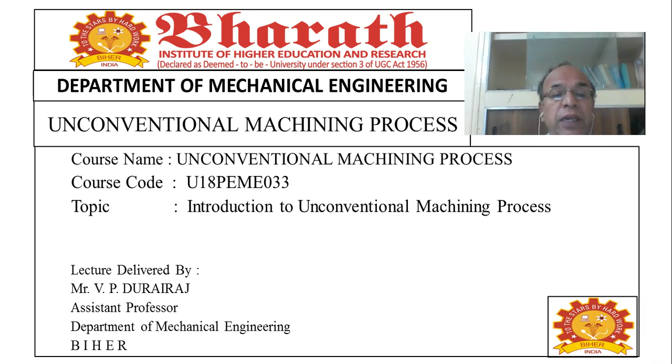Unconventional Machining Process. Course code U18Peme033. Topic: Introduction to Unconventional Machining Process. Lecture delivered by V. P. Durairaj, Assistant Professor, Department of Mechanical Engineering, Bharath Institute of Higher Education and Research. His subject is Unconventional Machining Process, and the syllabus covers Introduction, Need for Non-Traditional Machining Methods, Classification of Modern Machining Processes, Consideration in Process Selection, Materials, Conventional versus Unconventional Machining Process, Applications, Parameters, Economics Considerations, Applications and Limitations.

Introduction. The unconventional methods of machining have several specific advantages over conventional methods of machining, and this promises a formidable task to be undertaken and set a new record in manufacturing technology. These methods are not limited by hardness, toughness, and brittleness of materials and can produce any intricate shape on any workpiece material by suitable control over the various physical parameters of the processes. However, unconventional methods are not suitable replacements for conventional machining methods but are only complementing them.

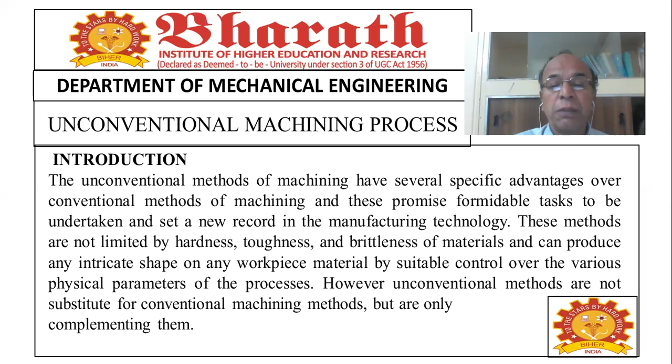The new technological processes can be classified into various groups according to type of energy required to shape materials: mechanical, thermal, electrothermal, chemical, or electrochemical. Basic mechanism involved in the process: erosion, ionic dissolution, vaporization. Source of energy required for material removal: hydrostatic pressure, high current density, high voltage, ionized material. Finally, medium of transfer of these energies: high velocity particles, electrolyte, electron, hot gases.

Demerits of conventional machining process. In conventional machining, metal is removed by chip formation, which is an expensive and difficult process. Chips produced during this process are unwanted byproducts. Removal of these chips and their disposal and recycling is a very tedious procedure involving energy and money. Very large cutting forces are involved in this process, so proper holding of the workpiece is most important.

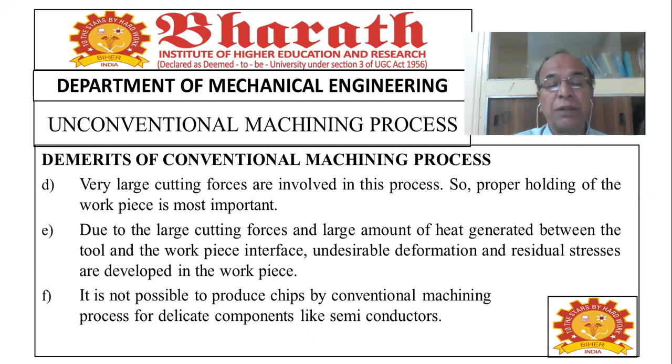Due to large cutting forces and large amount of heat generated between the tool and workpiece interface, undesirable deformation and residual stresses are developed in the workpiece. It is not possible to produce chips by conventional machining process for delicate components like semiconductors.

Needs for unconventional machining processes. The harder and difficult to machine materials such as carbides, stainless steel, nitralloy, and many other high strength temperature resistant alloys find wide application in aerospace and nuclear engineering industries. Many of these materials also find applications in other industries owing to their high strength to weight ratio, hardness, and heat resisting qualities.

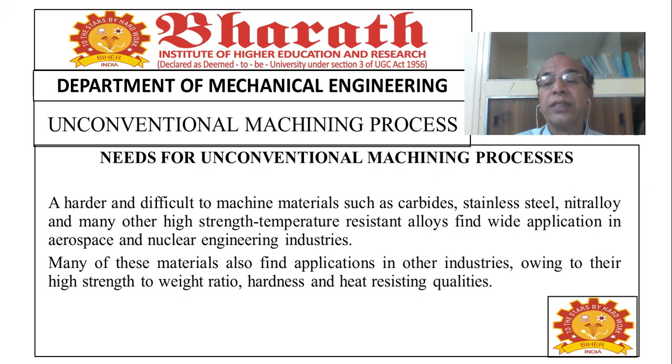For such materials, the conventional edged tool machining is highly uneconomical, and the degree of accuracy and surface finish attainable are poor. The unconventional machining processes have been developed to overcome all these difficulties.

Unconventional machining processes can be divided into two categories: first, unconventional machining processes or non-traditional machining processes; second, unconventional forming processes. Unconventional machining processes.

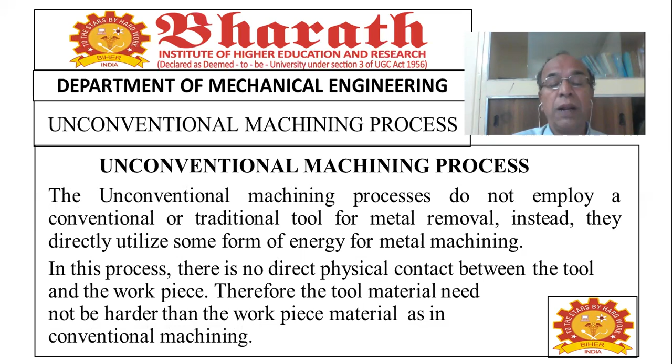The unconventional machining processes do not employ a conventional or traditional tool for metal removal. Instead, they directly utilize some form of energy for metal machining. In this process, there is no direct physical contact between the tool and workpiece. Therefore, the tool material need not be harder than the workpiece material as in conventional machining. In unconventional forming processes, the metals are formed through the release and application of large amount of energy in a very short time interval.

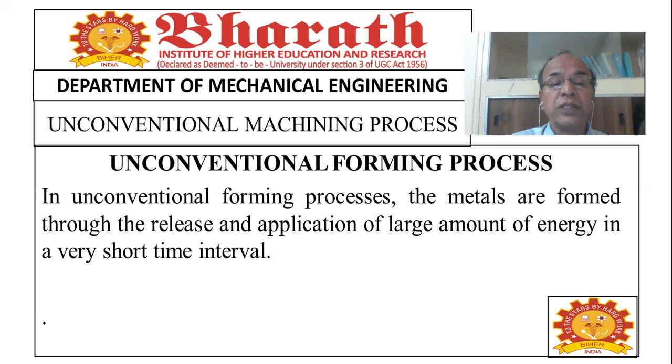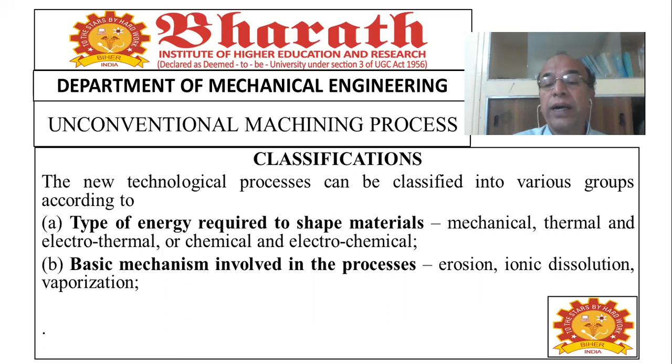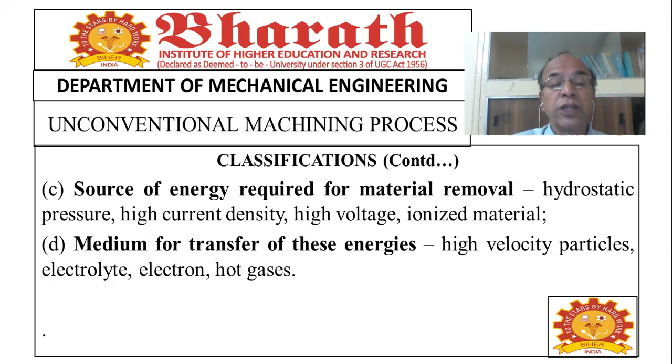Classifications. The new technological processes can be classified into various groups according to: A. Type of energy required to shape materials - mechanical, thermal, electrothermal, chemical, or electrochemical. B. Basic mechanism involved in the processes - erosion, ionic dissolution, vaporization. C. Source of energy required for material removal - hydrostatic pressure, high current density, high voltage, ionized material. The medium for transfer of these energies - high velocity particles, electrolyte, electron, hot gases.

Thermal energy methods. In these methods, heat energy is concentrated on a small area of the workpiece to melt and vaporize the tiny bits of work material. The required shape is obtained by the continued repetition of this process. Thermal energy method examples: laser beam machining, plasma arc machining, electron beam machining, ion beam machining, hot machining.

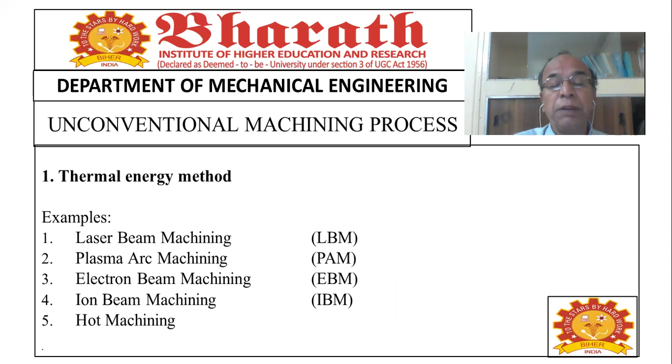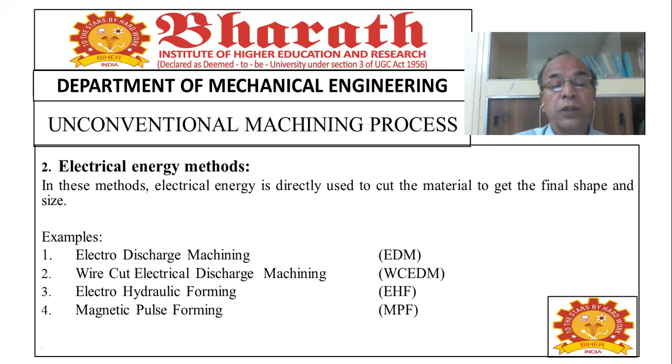Second, electrical energy methods. In these methods, electrical energy is directly used to cut the material to get the final shape and size. Examples: electro discharge machining, wire cut electrical discharge machining, electro hydraulic forming, magnetic pulse forming.

Third, electrochemical energy methods. In these methods, material is removed by ion displacement of workpiece materials in contact with the chemical solution. Examples: electrochemical machining, electrochemical grinding, electrochemical honing, electrochemical deburring, explosive fabrication, that means high energy rate forming.

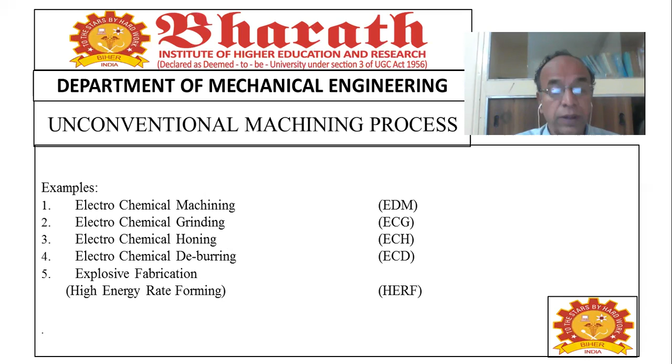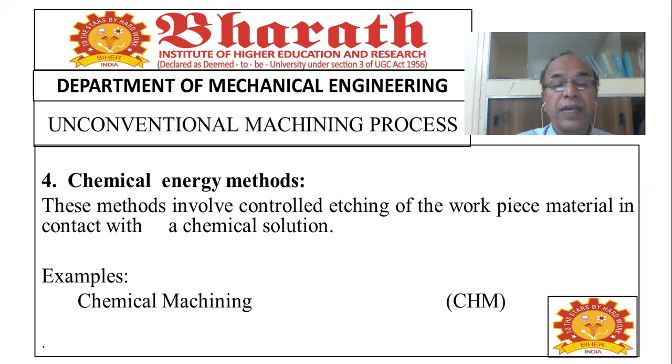Chemical energy methods. These methods involve controlled etching of the workpiece material in contact with a chemical solution. Example: chemical machining.

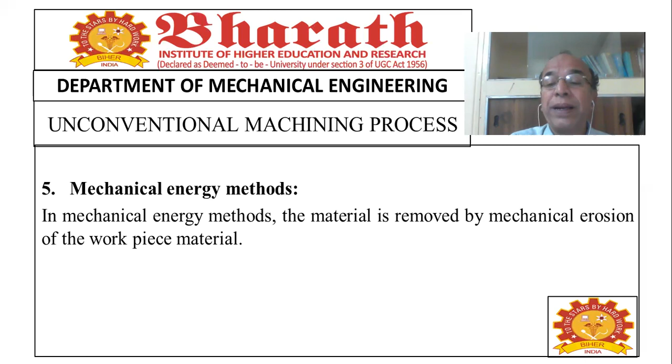Mechanical energy methods. In mechanical energy methods, the material is removed by mechanical erosion of the workpiece material. Examples: ultrasonic machining, abrasive jet machining, water jet machining, high velocity forming.

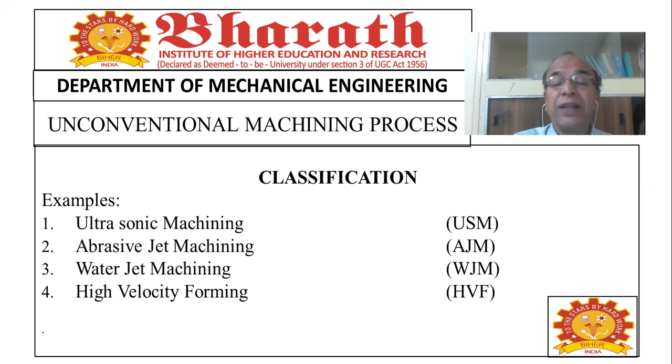Titanium materials can be used by EDM. Superalloys can be used by AJM, ECM, EDM, PAM. Steel by ECM, CHM, EDM, PAM.

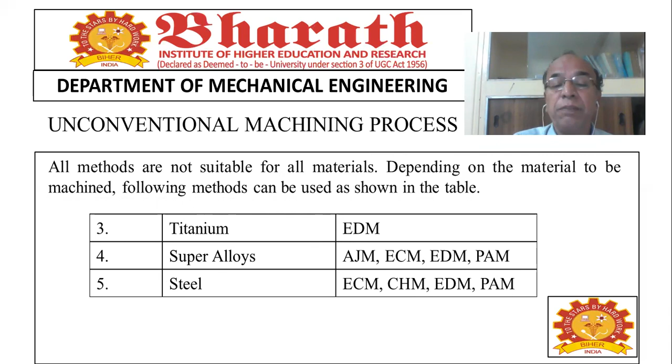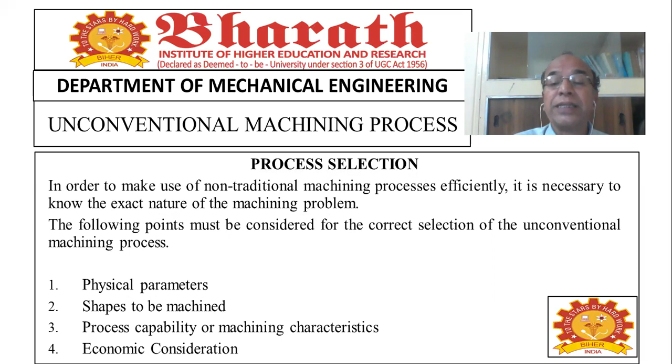Process selection. In order to make use of non-traditional machining processes efficiently, it is necessary to know the exact nature of the machining problem. The following points must be considered for the correct selection of unconventional machining processes: physical parameters, shapes to be machined, process capability or machining characteristics, economic consideration.

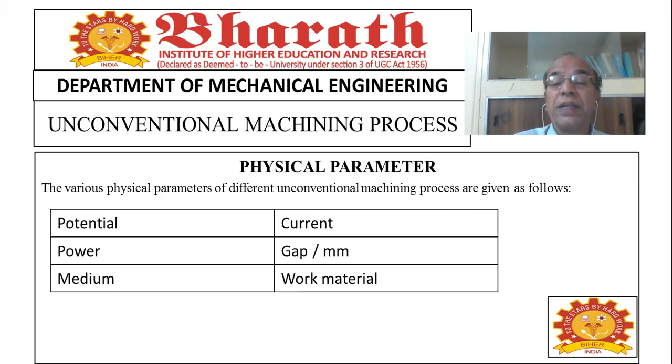Physical parameters. The various physical parameters of different unconventional machining processes are given as follows: potential, power, medium, current, gap per millimeter, work material.

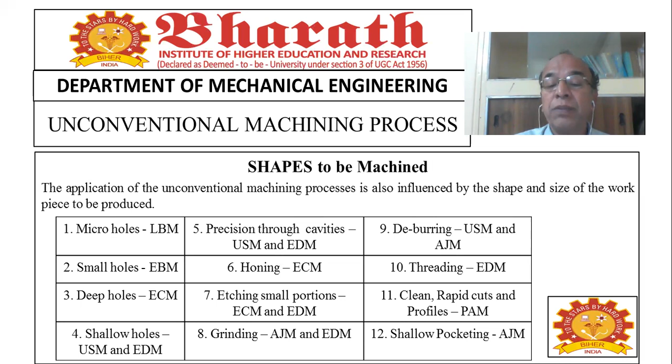Shapes to be machined. The application of the unconventional machining process is also influenced by the shape and size of the workpiece to be produced. Small micro holes: LBM. Small holes: EBM. Deep holes: ECM. Shallow holes: USM and EDM. Precision through cavities: USM or EDM. Honing: ECM. Etching small portions: ECM or EDM. Grinding: AJM or EDM. Deburring: USM and/or AJM. Threading: EDM. Clean rapid cuts and profiles: PAM. Shallow pocketing: AJM.

Process capability. The machining characteristics or process capability can be analyzed with respect to metal removal rate obtained, tolerance maintained, surface finish obtained, depth of surface penetration, power required for machining.

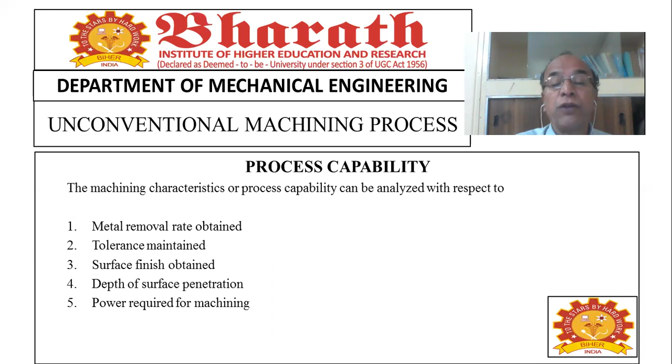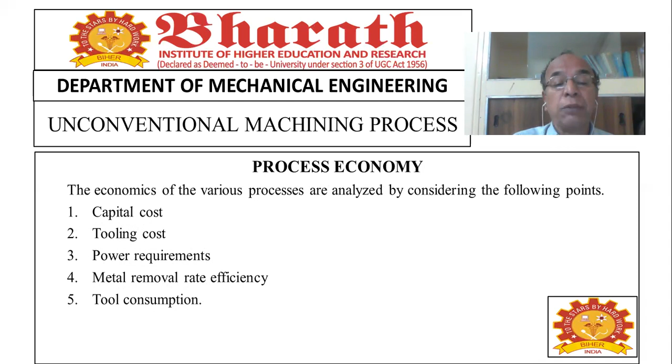Process economy. The economics of the various processes are analyzed by considering the following points: capital cost, tooling cost, power requirements, metal removal rate efficiency, tool consumption.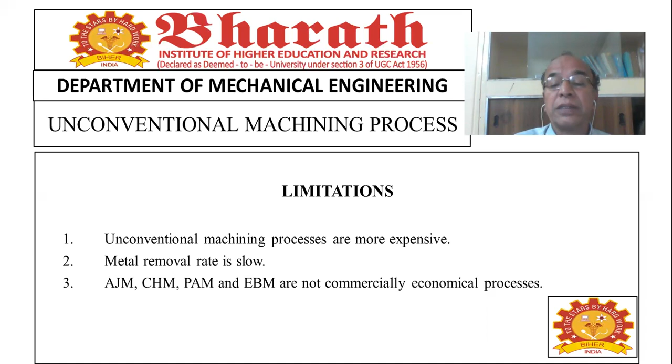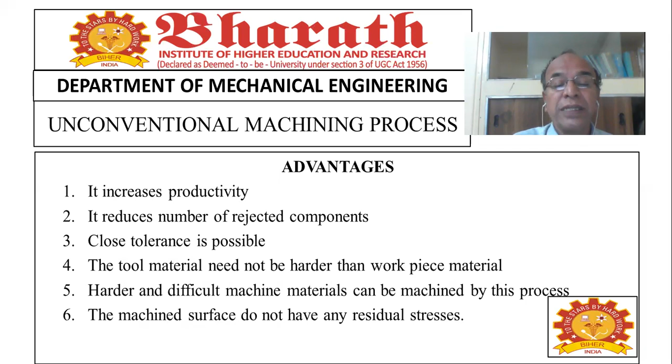Advantages. It increases productivity, it reduces the number of rejected components, close tolerance is possible, the tool material need not be harder than the workpiece material, harder and difficult-to-machine materials can be machined by this process. The machined surface does not have any residual stresses.

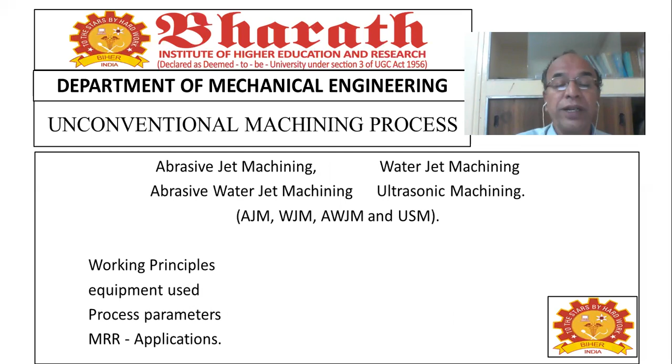Abrasive jet machining, water jet machining, abrasive water jet machining, ultrasonic machining - these are all mechanical energy based machining. For this, we are going to study the work principles, the equipment used, process parameters, material removal rate, and applications.

First, abrasive jet machining. Abrasive jet machining is the process of impinging a high-speed stream of abrasive particles by high-pressure gas or air on the work surface through a nozzle, and metal removal occurs due to erosion caused by the high-speed abrasive particles.

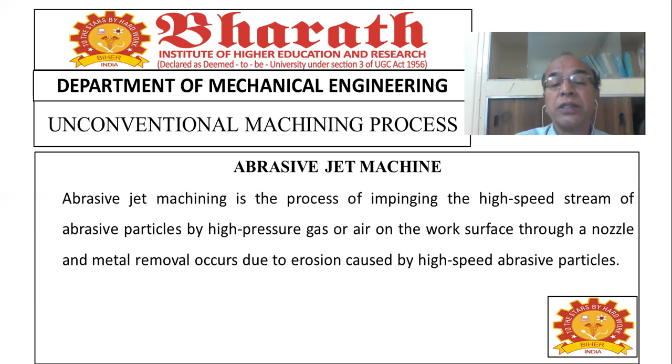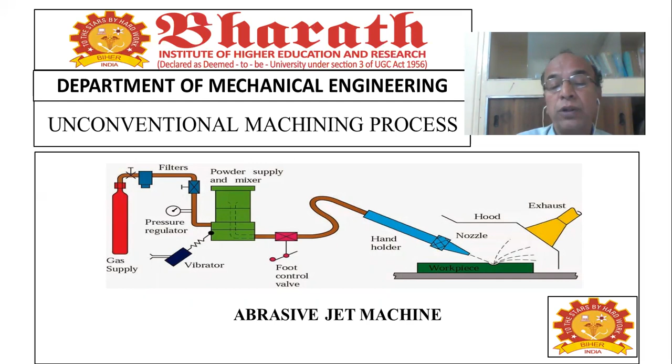Construction and working of abrasive jet machine. It consists of a mixing chamber, a gas filter, pressure gauge, regulator, and the nozzle. The filtered gas at a pressure of 2 to 8 kgf per centimeter square is supplied to the mixing chamber containing the abrasive powder.

The chamber vibrates at 50 Hz, where it mixes with abrasive particles and then enters into the connecting hose. The abrasive and gas mixture comes out from the nozzle at a high velocity ranging from 150 to 300 meters per minute and impinges over the work surface, causing abrasion action by repeated impacts, and the material is removed by erosion. Abrasive powder feed rate can be controlled by the amplitude of vibration of the mixing chamber.

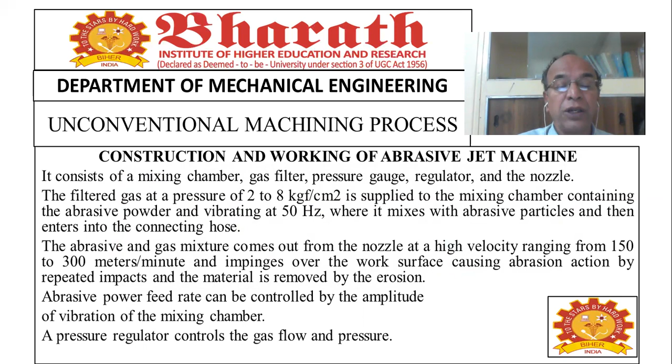A pressure regulator controls the gas flow and pressure. To control the size and shape of the cut. Either the workpiece or nozzle is moved by cams, pantographs, or other suitable mechanisms.

The carrier gas should be cheap, non-toxic, and easily available. It is generally air or nitrogen. Abrasives generally used are aluminum oxide, silicon carbide, or glass powder. The nozzle is generally made of harder materials such as ceramic or tungsten carbide to reduce abrasion wear.

The material removal rate depends on the diameter of the nozzle, jet pressure, composition of the mixture, hardness of the abrasive particles and workpiece, particle size, the velocity of the jet, and the distance between work and nozzle.

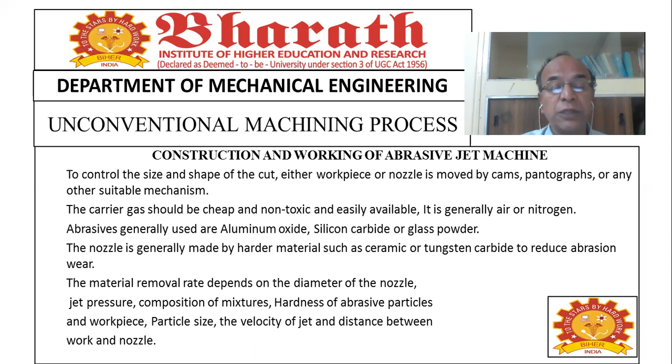Metal removal rate process parameters. The metal removal rate depends upon the following parameters: mass flow rate, abrasive grain size, gas pressure, velocity of abrasive particles, mixing ratio, and nozzle tip clearance.

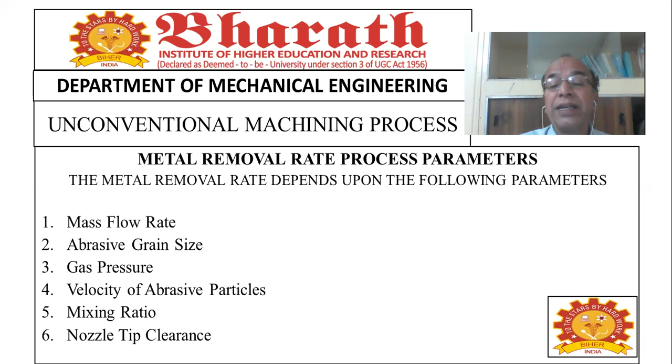Mass flow rate: At a particular pressure, the material removal rate increases with the abrasive flow rate. But after reaching an optimum value, the material removal rate decreases with further increase in abrasive flow rate. This is due to the fact that the flow rate of gas or air decreases with the increase of abrasive flow rate.

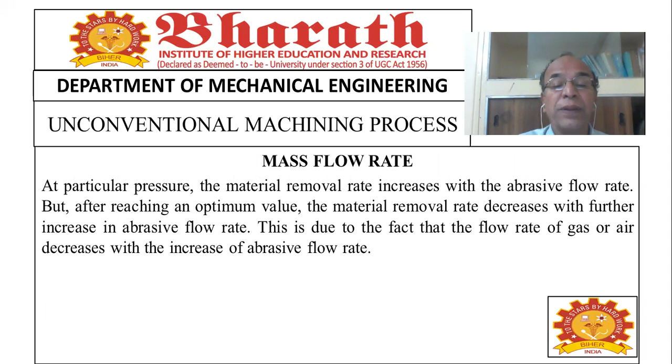Abrasive grain size: The various abrasive particles used in the AJM process are aluminum oxide, silicon carbide, glass powder, dolomite, and specially prepared sodium bicarbonate. Aluminum oxide is a general purpose abrasive used in sizes of 10, 25, and 50 microns. Silicon carbide is used for faster cutting on extremely hard materials, in sizes of 25 and 50 microns.

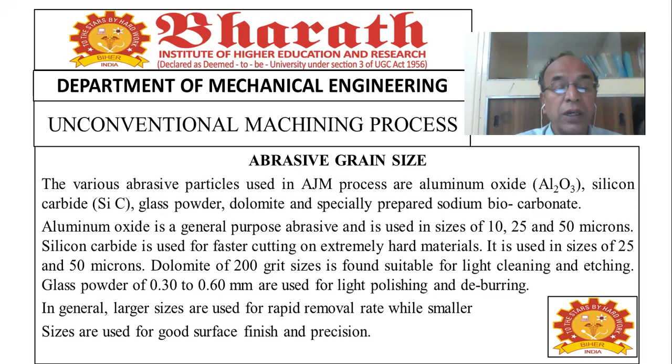Dolomite of 200 grit size is found suitable for lighter cleaning and etching. Glass powder of 0.30 to 0.60 mm is used for light polishing and deburring. In general, larger sizes are used for rapid removal rate, while smaller sizes are used for good surface finish and precision.

Gas pressure: The metal removal rate increases with increase in gas or air pressure, in direct proportion. Velocity of abrasive particles: The metal removal rate increases with the increase of velocity of abrasive particles, in direct proportion.

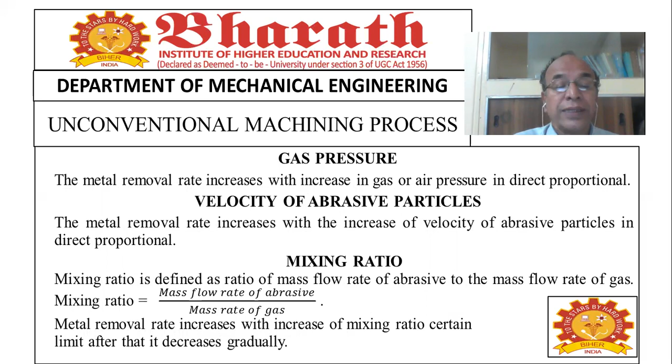Mixing ratio is defined as the ratio of mass flow rate of abrasive to the mass flow rate of gas. Mixing ratio equals mass flow rate of abrasive divided by mass flow rate of gas. Metal removal rate increases with increase of mixing ratio up to a certain limit, after which it decreases gradually.

Standoff distance, or nozzle tip clearance: The distance between the nozzle tip and the workpiece has great influence on the diameter of the cut, its shape, size, and also on the rate of material removal. The material removal rate first increases with the increase of tip clearance from the workpiece up to a certain limit. After that, it remains unchanged for a certain tip clearance and decreases gradually.

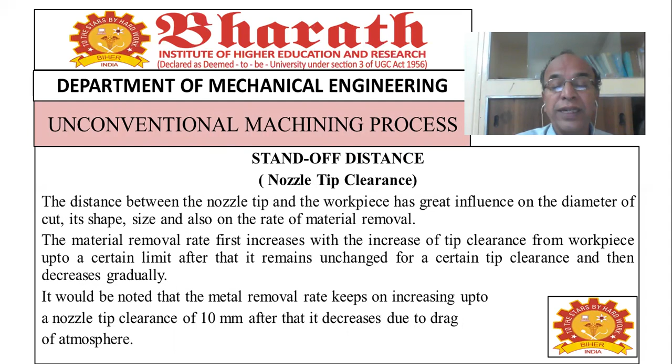That means the material removal rate first increases with the increase of tip clearance from the workpiece up to a certain limit. After that, it remains unchanged for a certain tip clearance and then decreases gradually. It would be noted that the metal removal rate keeps increasing up to a nozzle tip clearance of 10 mm. After that, it decreases due to drag of the atmosphere.

Advantages of abrasive jet machining: The process is suitable for cutting all materials. Even diamond can be machined by using diamond as an abrasive. There is no heat generation during this process, so thermal damage to the workpiece is avoided.

Very thin and brittle materials can be cut without any risk of breaking. There is no direct contact between the tool and the workpiece. Low initial investment, good surface finish. It can be used to cut intricate hole shapes in hard and brittle materials.

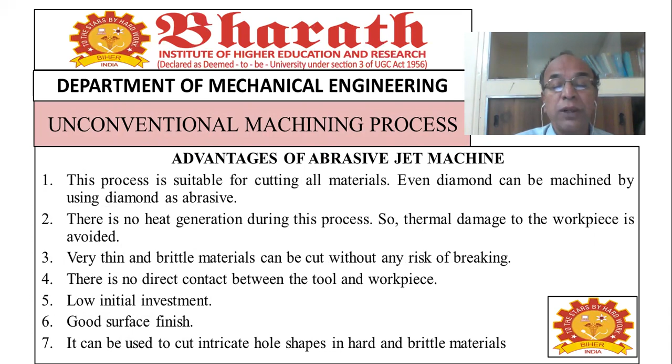Disadvantages of AJM: Material removal rate is slow. Soft material cannot be machined. Machining accuracy is poor. Nozzle wear rate is high.

The abrasive powder used in this process cannot be reused. There is always a danger of abrasive particles getting embedded in the workpiece, so cleaning is essential after the operation. It requires some kind of dust collection system.

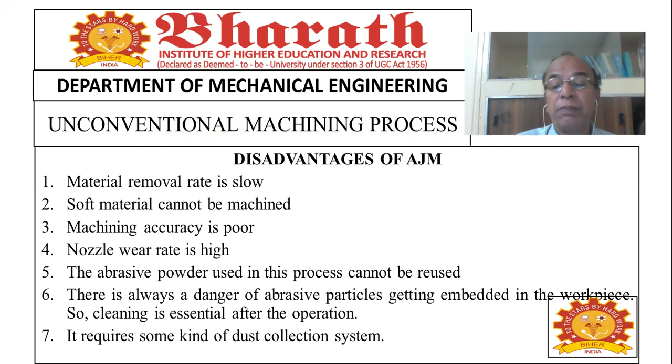Applications of AJM: where all are we using this one? The process is widely used for machining of hard and brittle materials like quartz, ceramics, glass, sapphire, etc. Fine drilling and micro cutting. Machining of semiconductors. Machining of intricate profiles on hard and brittle materials.

Cleaning and polishing of plastics, nylon, and Teflon components. Frosting of the interior surface of glass tubes, surface etching, and surface preparation.

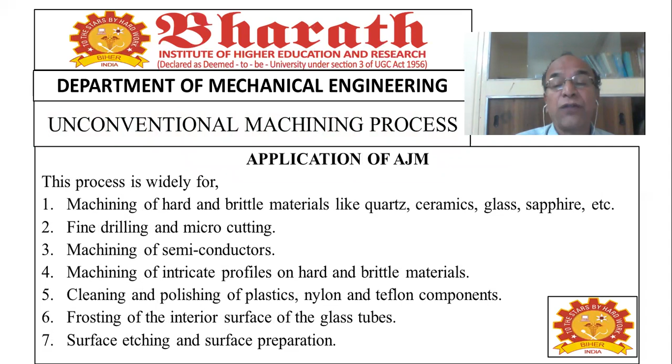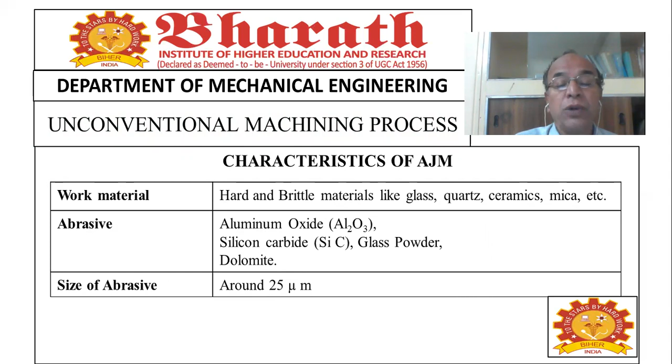Characteristics of AJM: Work material - hard and brittle materials like glass, quartz, ceramics, mica, etc. Abrasives - aluminum oxide, silicon carbide, glass powder, dolomite. Size of abrasive around 25 micrometers. Flow rate 2 to 20 grams per minute.

Medium: nitrogen, carbon dioxide, or air. Velocity 125 to 300 meters per second. Pressure 2 to 8 kg per square centimeter. Nozzle material: tungsten carbide or synthetic sapphire.

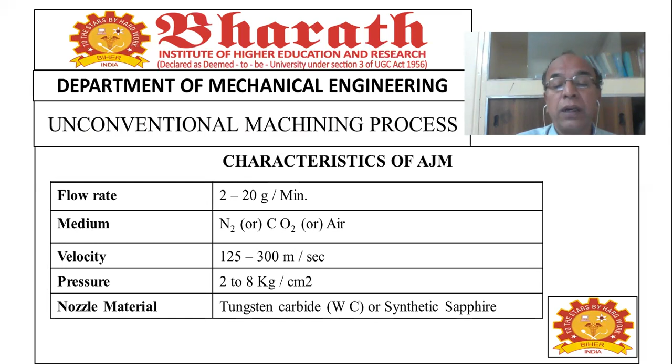Next, we are going to water jet machining. Introduction: Water jet machine (WJM) process is an extension of the abrasive jet machine process. In this process, a high pressure and high velocity stream of water is used to cut relatively soft and non-metallic materials like paper boards, wood, plastics, rubber, fiberglass, leather, etc.

Principle: When the high velocity water jet comes out of the nozzle and strikes the material, its kinetic energy is converted into pressure energy, inducing high stresses in the work material. When this induced stress exceeds the ultimate shear strength of the material, small chips of the material get loosened and a new surface is exposed.

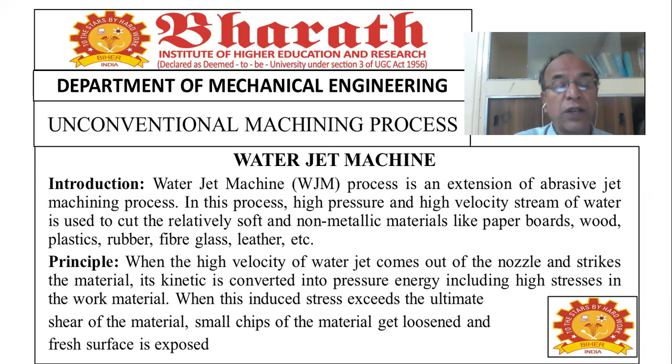This is a schematic drawing for water jet machine. Water is pumped through the pipeline and it directly comes to the surface of the workpiece. Abrasive also comes and mixes with that water and it is forcibly fed on the surface of the material. Then there is a cutting action where abrasion takes care of removing the material.

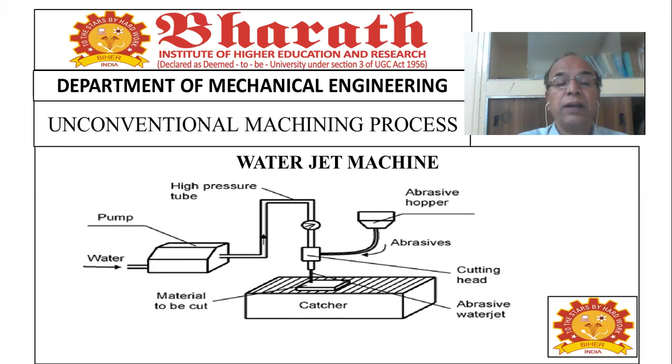Water jet machine construction. It consists of pump, accumulator, control valve, regulating chamber, nozzle, etc. A pump or intensifier is used to raise the pressure of water. Pressure normally used in the system is in the range of 1500 to 4000 Newton per millimeter square. Since the cutting action may not be continuous, the accumulator is used to store the water and also it helps in eliminating pulsation.

Nozzle is used to increase the velocity of the water jet. The nozzle is made up of sintered diamond, tungsten carbide, or synthetic sapphire. The exit diameter of the nozzle is in the range of 0.05 to 0.35 millimeter, and the exit velocity of the water jet from the nozzle varies up to 920 meter per second. A regulating chamber is incorporated to control the flow of water.

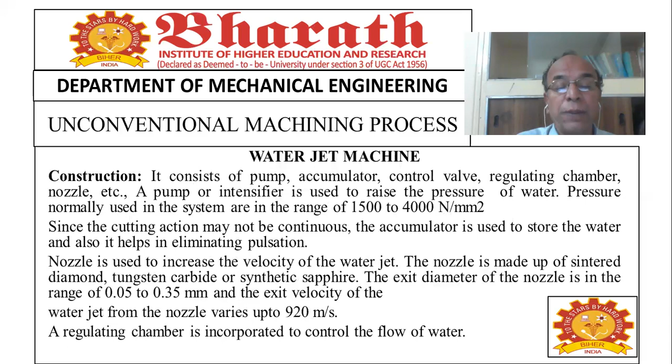Working principle. The working principle of water jet machining is very similar to that of abrasive jet machining. A pump or intensifier is used to increase the pressure of water and the water passes onto an accumulator from the pump. Water under pressure from a hydraulic accumulator is passed through the orifice of a nozzle to increase its velocity.

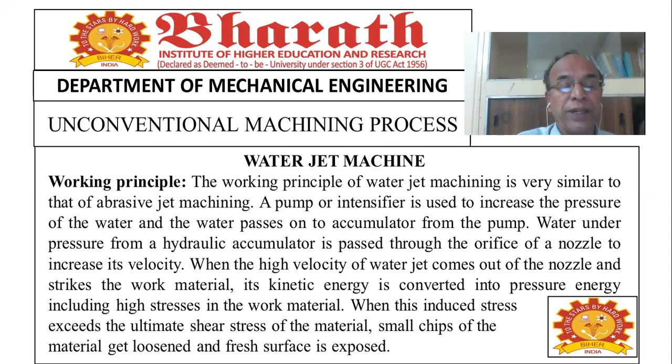When the high velocity water jet comes out of the nozzle and strikes the material, its kinetic energy is converted into pressure energy, inducing high stresses in the material. When this induced stress exceeds the ultimate shear stress of the material, small chips of the material get loosened and a fresh surface is exposed.

Process parameters. The following parameters are needed to utilize the water jet machining process successfully: material removal rate, geometry and surface finish of material, and wear rate of the nozzle.

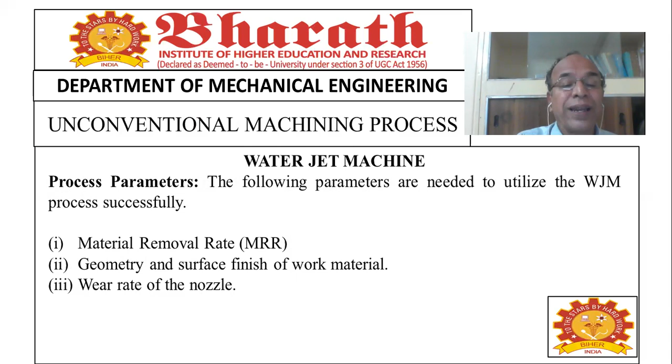Material removal rate. In water jet machining process, material removal rate is directly proportional to the reactive force of the jet. That means MRR is directly proportional to F. MRR is directly proportional to M into V, that means F equals M into V, where M is the mass flow rate and V is the jet velocity.

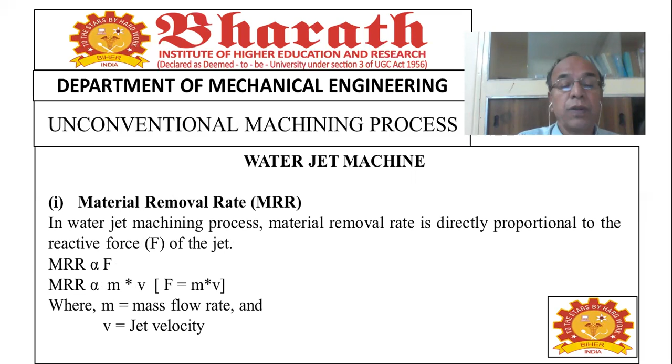Material removal rate: mass flow rate depends on nozzle diameter and fluid pressure. Jet velocity depends on the fluid pressure. MRR is directly proportional to the diameter of the nozzle and pressure.

Stand-off distance is the distance between the nozzle tip and the surface of the material being machined. When MRR increases, the stand-off distance also increases up to a certain limit. After that, it remains unchanged for certain tip distances, and then falls gradually.

Geometry and surface finish of work material. Geometry and surface finish of material mainly depend on the following parameters: nozzle design, jet velocity, cutting speed, depth of cut, and properties of material to be machined.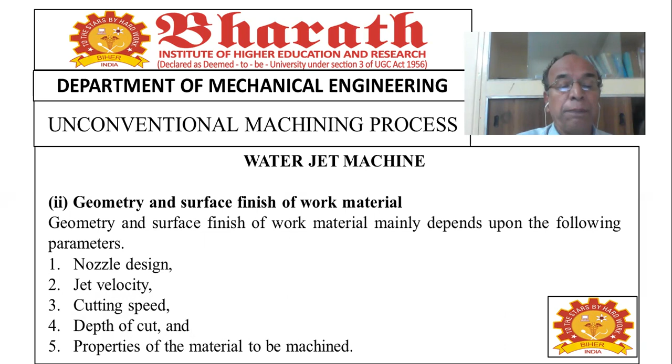Wear rate of the nozzle. Nozzle wear rate depends on the following factors: hardness of the nozzle material, pressure of the jet, velocity of the jet, and nozzle design.

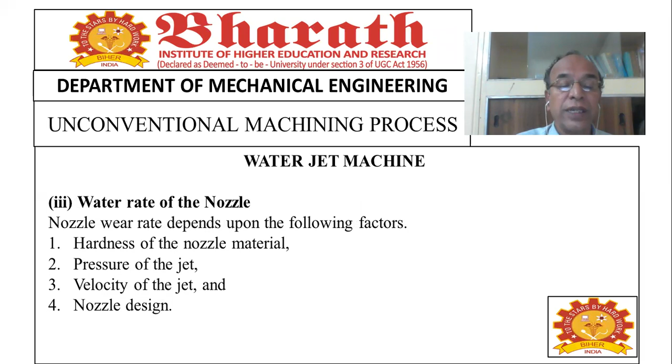Advantages. In water jet machining processes, water is used as the energy transfer medium. It is cheap, non-toxic, and easy to dispose. Low operating cost, low maintenance cost. The work area remains clean and dust-free. Very less amount of heat is generated during cutting operation, so there is no thermal damage to the work. It is easily automated.

Disadvantages. Initial cost of this process is high. It is difficult to machine hard materials. It has noisy operation. Applications: this process is very convenient for cutting relatively soft and non-metallic materials like paper boards, plastic, wood, rubber, leather, fiberglass, etc. It can be used to cut intricate contours.

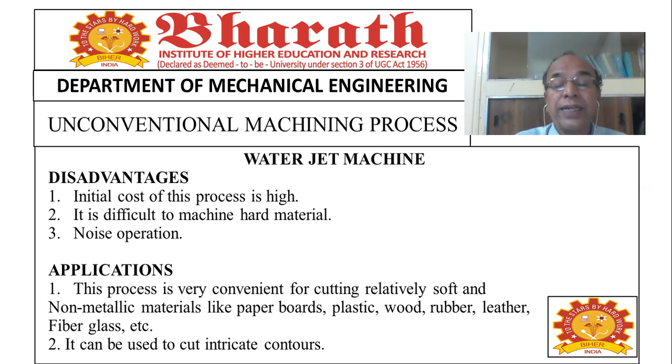So this is water jet machining. This is the schematic drawing for the abrasive water jet machine. This is the abrasive water jet machine.

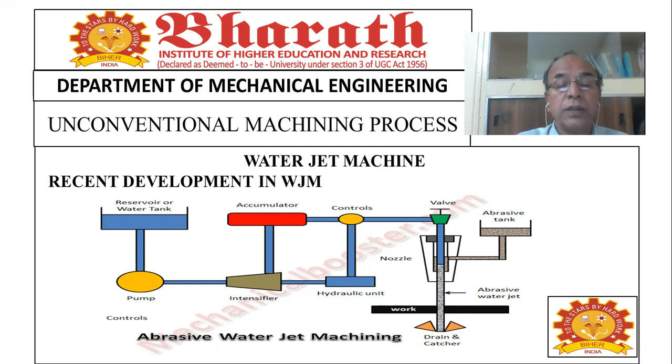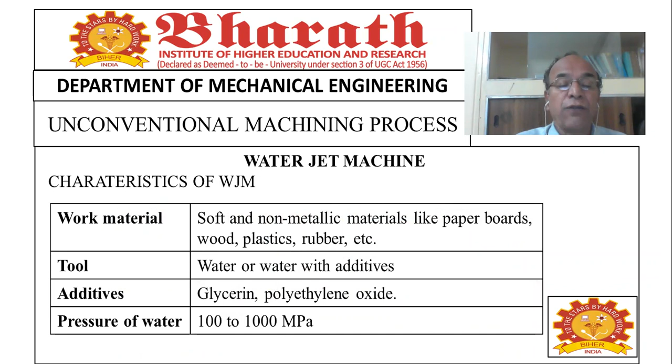This is the characteristics of water jet machine. Work material: soft and non-metallic materials like paper boards, wood, plastics, rubber, etc. Tool: water or water with additives. Additives: glycerin, polyethylene oxide. Pressure of water: 100 to 1000 megapascals. Mass flow rate: 8 liters per minute. Power: 45 kilowatt. Metal removal rate: 0.6 millimeter cube per second. Feed rate: 1 to 4 mm per second. Nozzle material: tungsten carbide or synthetic sapphire. Standoff distance: 2 to 50 mm.